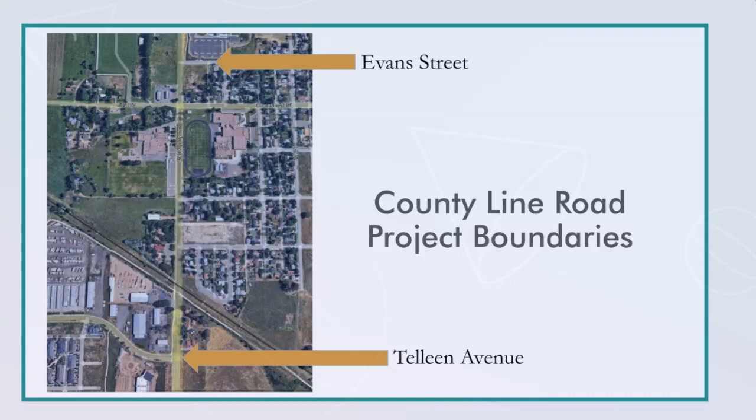The process for which we developed our two conceptual designs is as follows. First, we evaluated the existing conditions. We collected traffic data, which includes vehicular, bicycle, and pedestrian data. Then we evaluated historical crash data to look for any crash trends that existed.

We solicited community input via an online survey on the website. And you can see the results of that survey on the tab on the top of the website titled What We Heard. We gathered all of this information together and developed two conceptual designs. And finally, I'm going to present them to you, and we're soliciting feedback on these two conceptual designs.

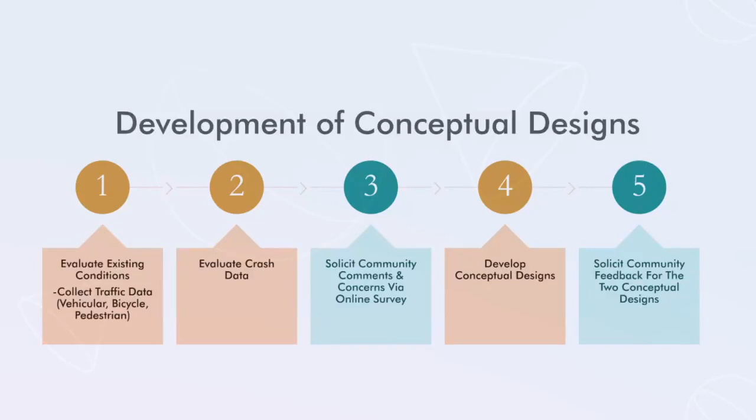So to introduce the designs, first off, I'd like to make note that both designs have the same roadway layout configuration. They both have an 11-foot travel lane in each direction and a 10-foot center left turn lane as needed, and when not needed, there's a median.

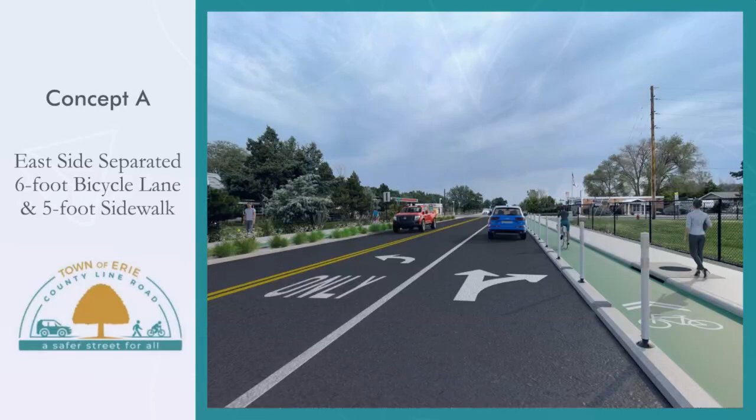Concept A has, on the east side, a separated 6-foot wide bicycle lane, followed by a 5-foot sidewalk. On the west side of Concept A, there's a 4-foot bioretention swale separating vehicular traffic from the bicycle lane, an additional 6-foot bicycle lane, and then a 5-foot sidewalk. This layout takes the entire 60 feet of right-of-way.

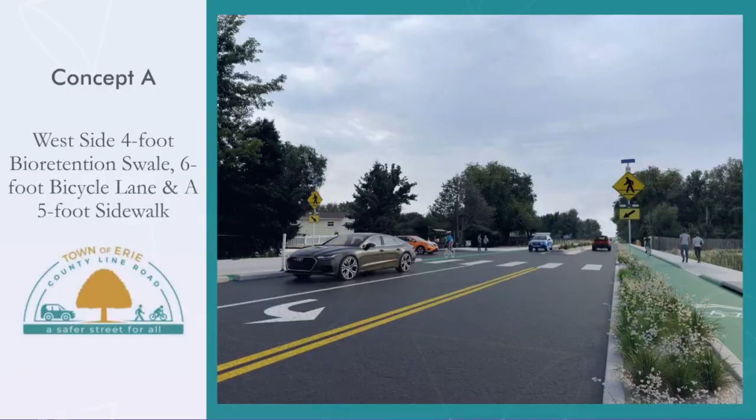As a reminder, Concept B has the same roadway layout configuration, which is an 11-foot travel lane in each direction and a 10-foot center left turn lane as needed or median. On the east side of Concept B, there's a 5-foot boulevard, which can house bioretention swale, signs as needed, and any utilities, and then a 5-foot sidewalk.

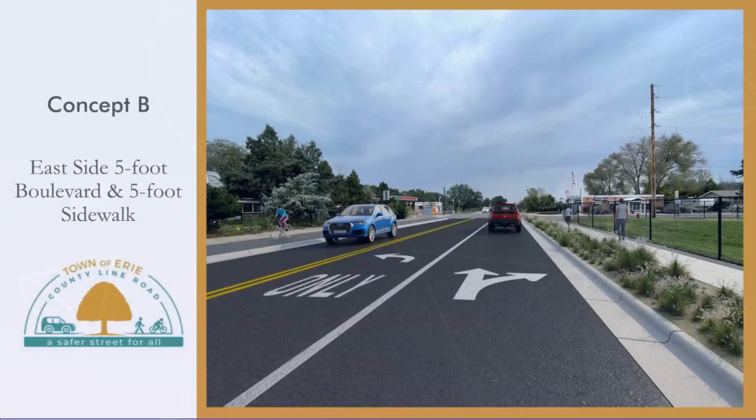On the west side of Concept B, there's a 10-foot wide multi-use trail. This layout allows for 1.5 feet of catch slope where the design intersects with the existing ground on each side.

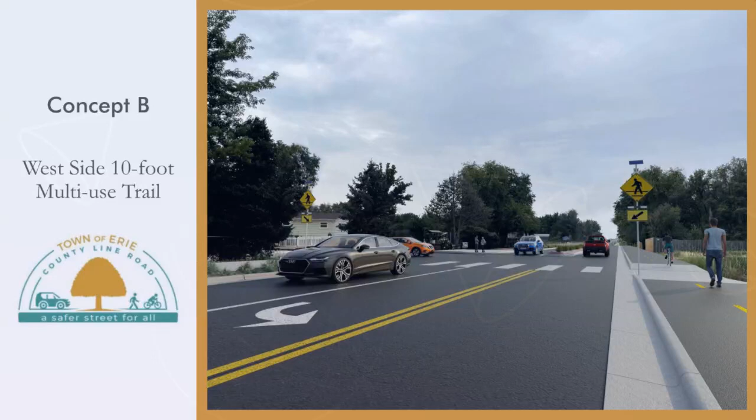When we're comparing different conceptual designs, it's helpful to look at a pros and cons table. Notice that the first two rows, existing infrastructure and intersection safety, are the same for both concepts because the layout is the same for the roadway for both concepts.

When we looked at the required right-of-way easements, Concept B is preferred because that 1.5 feet of catch slope on each side helps to reduce the amount of temporary construction easements that would be needed. This significantly reduces the price.

When we're looking at active transportation, both concepts provide a physical barrier between vehicles and the active transportation modes. However, Concept A allows separation between pedestrians and bicyclists, where Concept B is a multi-use path to accommodate both pedestrians and bicyclists.

Regarding utility issues, Concept B is preferred because utilities can be housed within that catch slope area. This decreases the need for relocation of utilities, which decreases the price substantially. When we looked at the public opinion from the community survey, 53.5% preferred the idea of a multi-use trail versus separated bike lanes and sidewalks.

The most cost-effective option is Concept B because of the reduced cost due to utility issues, and also those temporary construction easements.

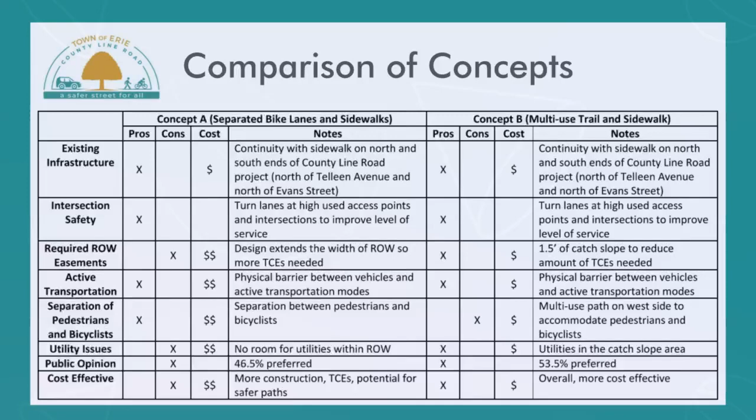I appreciate your time and attention listening to this presentation and would love to hear your opinion on what concept you prefer. Please vote on our website and note that there is an area where you can add comments as needed. Thanks so much for your attention to this. We want to help design a corridor that suits the town of Erie's County Line community. Thank you.